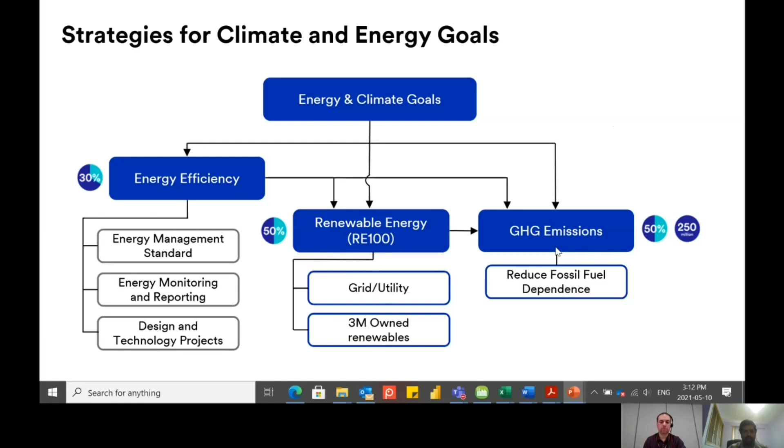And I think Brian will start from here. Yeah, thank you. So we want to talk to you about the EverActive system that we are trialing here.

The system consists of three different components: the sensor in the field, a gateway that's in proximity to the sensor, and then EverActive's cloud system. The sensor sends data to the gateway, and the gateway gets it onto the internet where the cloud can read and store the data and provide some analytics.

The sensor provides data back to the EverCloud system, and the EverCloud system makes the determination based on the thermocouple data whether the trap is bad or not. If the downstream pipe is hot, it will assume the trap might be open when it should be closed, or if it's constantly cold, it will assume the trap has failed shut.

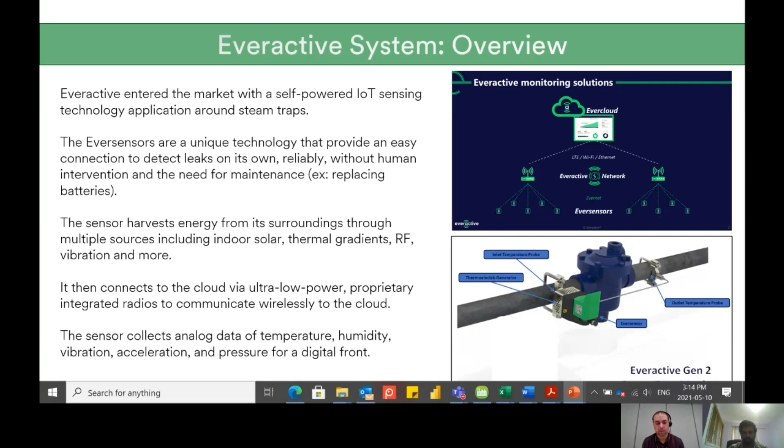We have our system set up to provide us with email notifications. You can do summary notifications, text messages, and other real-time notifications. Next slide.

We've monitored 50 traps as part of this pilot. We've had them in for over 6 months now. During this time, we've detected 12 bad traps, which is about 24%. We estimated that without this system, we would have a bad trap installed for about 45 days before we could respond to it, meaning 45 days of energy loss. With the system in place, our average time until we could get a trap replaced was 12 days. So with that, we saw cost savings of 74% from reduced steam loss, or in other words, 10,600 klbs.

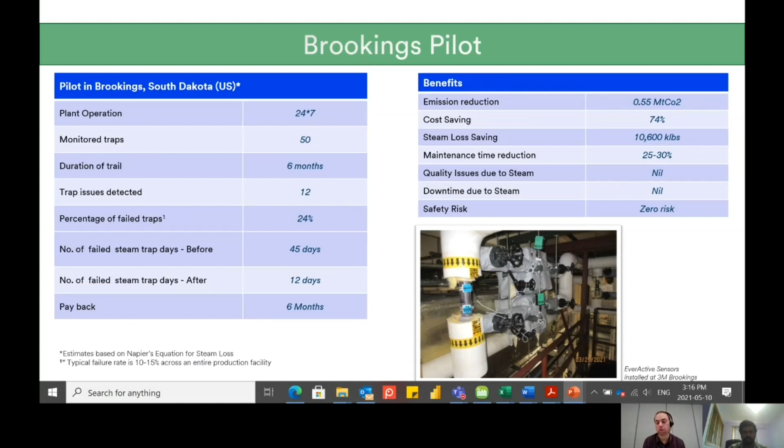So again, you have heard the benefit that we looked into it from Brookings. So as a corporate, we want to expand this to the other 3M facilities to start monitoring the steam online. So we put together a proposal for the top management. We started calculating some of the benefits, how it looks when we implement this across the US and Canada sites. We have about 9,300 traps and more. So we quickly calculated what will be the cost savings if there is a 15% failure rate. We are achieving like 24% of cost savings on it. The emission reduction by that is about 160 kilotons of CO2, and the payback is about 4.2 months.

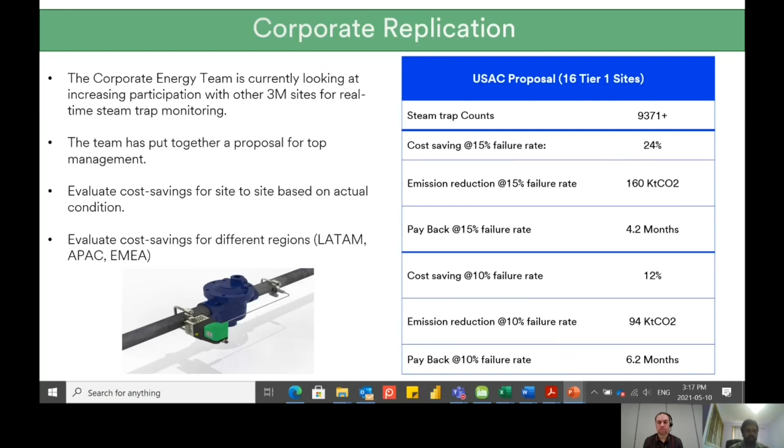We also calculated a similar type of assessment for a 10% failure rate, if the trap fails at 10% of total traps. We are able to calculate savings of about 12% reduction in cost, and the emission is about 94 kilotons of CO2, and the payback is 6.2 months. So it's somewhere between 6.2 to 4.2 months where our failure payback comes in. We are trying to do this globally, and we are working with different regions to see whether we can implement these projects across 3M to benefit.

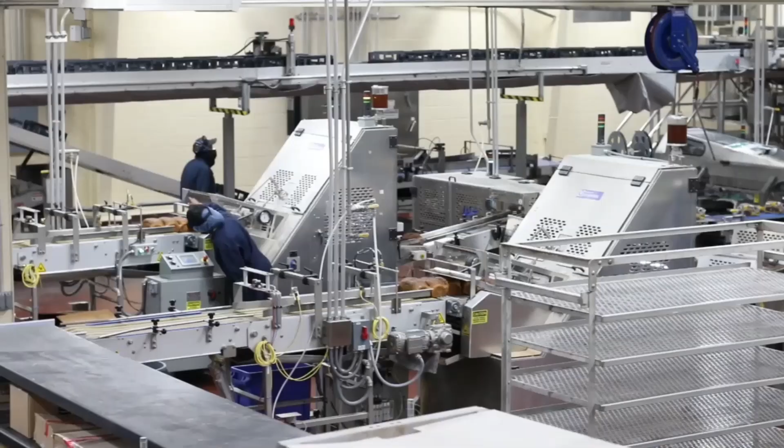Good afternoon. I'm Margaret Marsh, Vice President of Sustainability and Environmental at Flowers Foods, and I'm pleased to share the story of the conversion of our Lynchburg facility from a traditional bread bakery into a facility capable of 100% organic baking. Before I start, I'd like to take a moment and thank the DOE for this honor.

The Better Project Award is particularly special for two reasons. First, it's a detailed and data-driven award, rooted in metrics. Second, it's such an honor to be recognized among such notable sustainability leaders. Congratulations to all presenting their projects today. We are learning from your examples.

Now, a bit about Flowers Foods. Flowers operates 46 bakeries in the U.S. Some bake traditional loaf bread and buns. Others specialize in baked snacks or gluten-free bread products, and some specialize in organic bread, for which the consumer demand is growing rapidly.

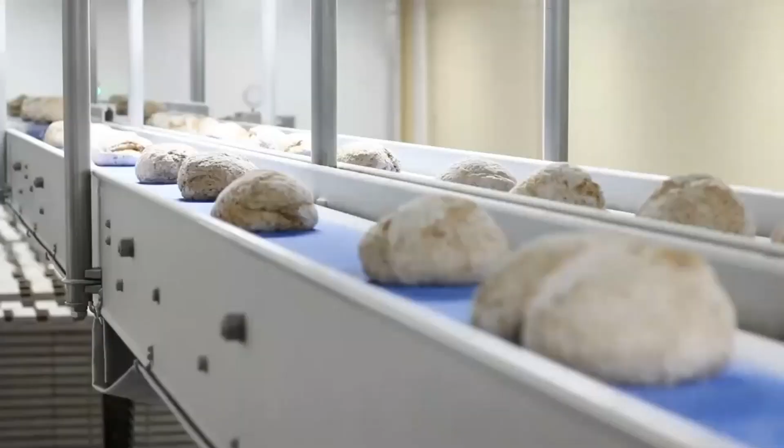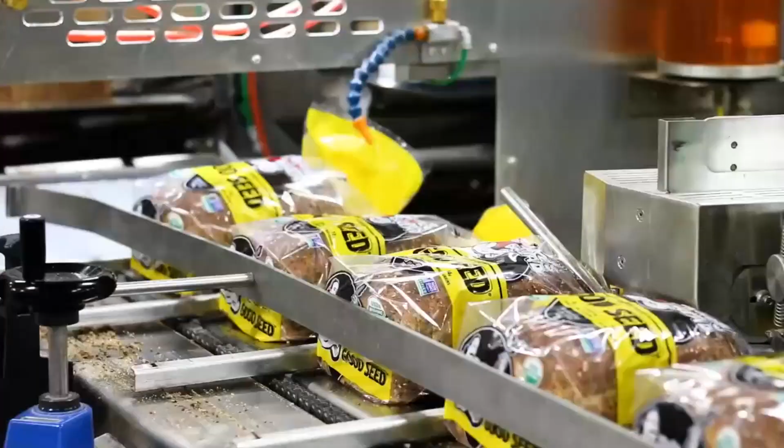That brings us to our organic upgrade in Lynchburg. To meet this increasing demand for organic bread, we converted an existing traditional bread bakery into a state-of-the-art, energy-efficient organic bakery focused on Dave's Killer Bread, the #1 organic bread brand in the U.S.

We selected our Lynchburg bakery for two reasons. First, a stable and reliable team of 125 dedicated employees. Second, the bakery's strategic location. Its proximity to key interstate highways helps reduce transport miles and improves access to important Mid-Atlantic and Northeast markets.

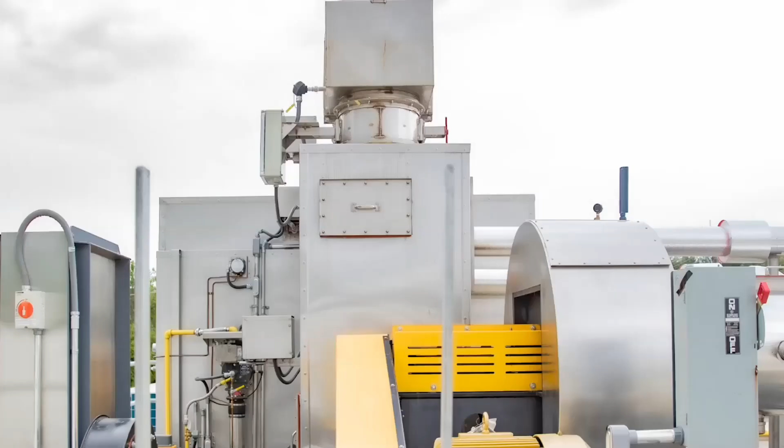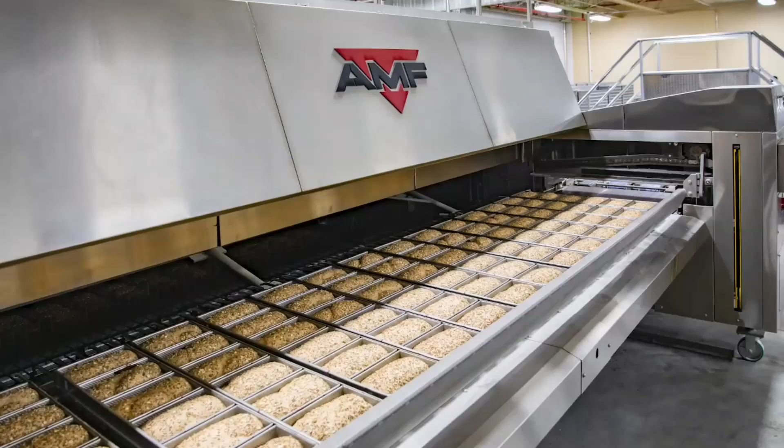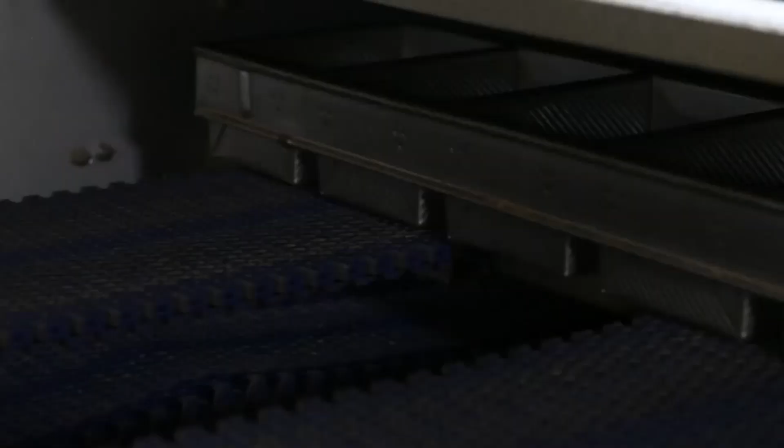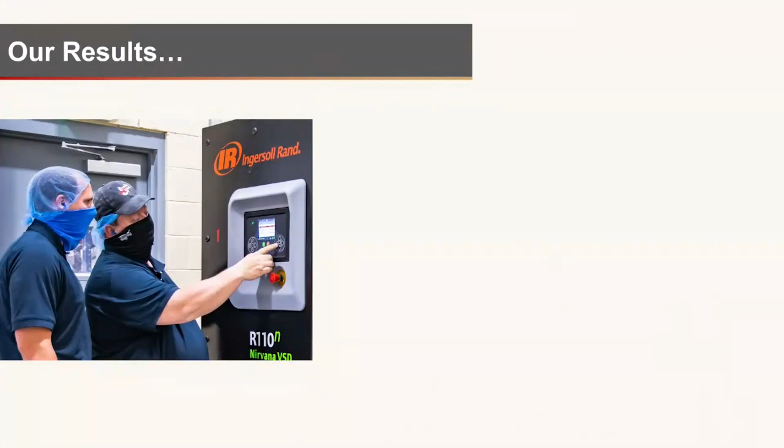This also reduces heat levels in the plant, especially during the summer months, making a more comfortable working environment for our bakery team. As we measured our outcomes, I find the numbers speak for themselves.

Based on 4 months of operational data, these energy-saving features decrease the energy intensity and water intensity of the bakery significantly. Overall, the upgraded sustainability features in our Lynchburg facility are predicted to reduce annual energy 22% and water consumption 64%.

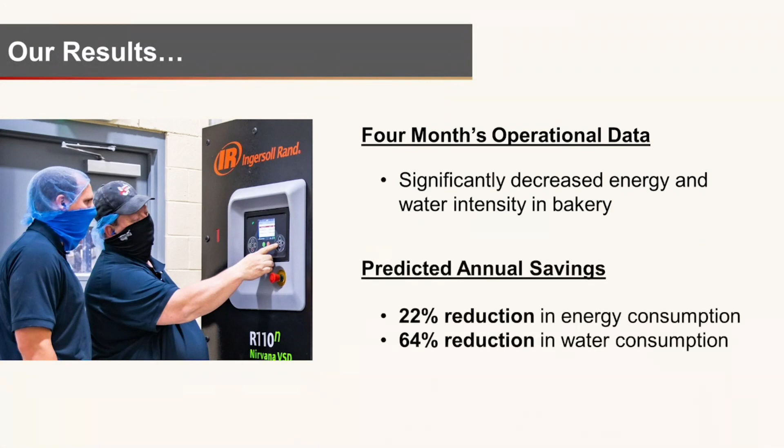But our most important metric? It's our people and the energy they put into this work. In fact, the results of our engineering and planning teams are outstanding. Due to COVID-19, construction was originally delayed 3 months. However, our dedicated corporate engineering team worked closely with vendors, and as a result, the bakery opening was only delayed by 1 month.

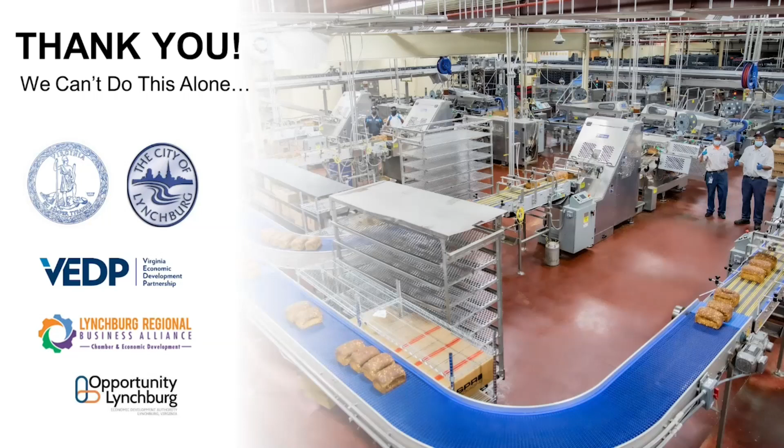That allowed our experienced and long-tenured bakery employees to return to work quickly and bake quality organic breads for the region. Throughout the project, we had unbelievable support from so many, and we say a heartfelt thank you for making this conversion such a success.

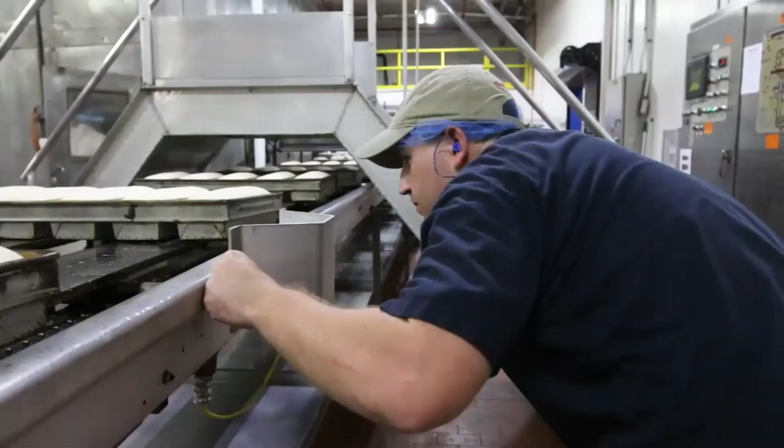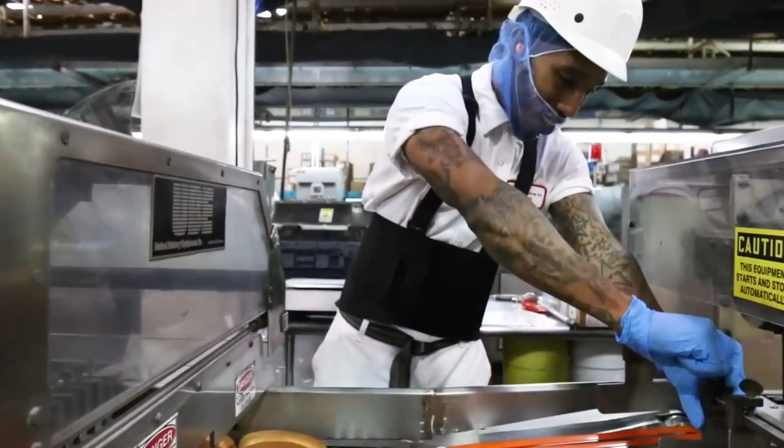Our story doesn't end here. This is a journey in continuous improvement across our entire bakery network. The Lynchburg organic conversion is the next iteration of past projects and learnings, and it serves as a platform to share and implement best practices during our next sustainability projects. On behalf of our team, I thank you again for this honor, and we look forward to seeing you again next year.

Good afternoon. My name is Scott Christensen. I'm an operations engineering manager with Graham Packaging Company, having responsibility for operational improvements within our North American plant operations.

Graham Packaging was founded in the 70s with the conversion from oil fiber cans to plastic containers. Our company now provides plastic containers for the food, beverage, home care, and industrial markets. Graham Packaging is an expert in sustainable, innovative, and creative packaging solutions. At the heart of this new Graham brand is the idea of being always inspired to create a better product and cleaner world.

At Graham Packaging, our commitment to sustainability goes beyond just the bottle. Recognizing that climate change is real, we are taking steps to reduce our greenhouse gas emissions by lightweighting our containers, diverting plastics from landfills, developing lower carbon products, locating facilities on site with customers, and energy reduction. Graham Packaging is driven to minimize our impact on the environment and work with consumers to create a circular economy.

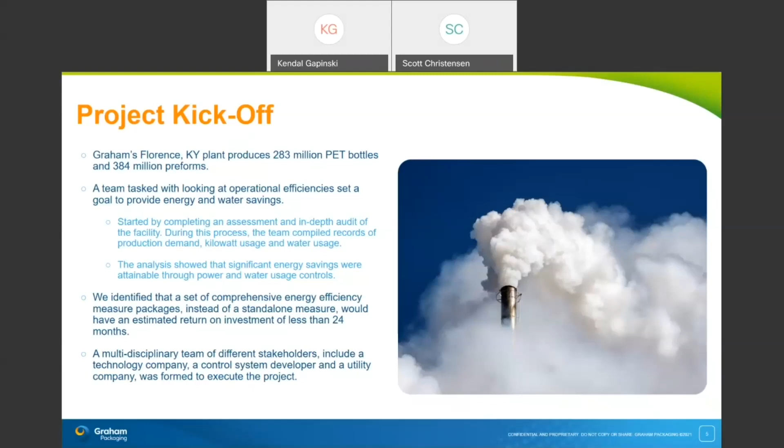We identified that a set of comprehensive energy efficiency measure packages, instead of a standalone measure, would have an estimated return on investment of less than 24 months. A multidisciplinary team of different stakeholders, including a technology company, a control system developer, and a utility company, was formed to execute the project.

During the team's discussions, it was determined that the energy savings measures implemented needed to also ensure that the plant could continue to operate the equipment at peak performance.

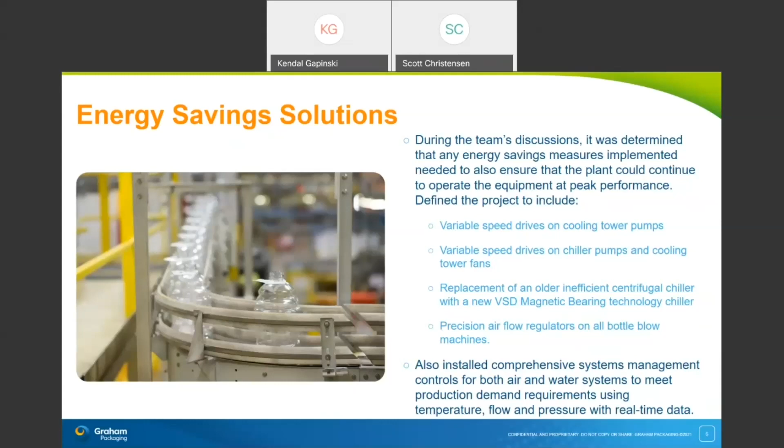The project included variable speed drives on cooling tower pumps, variable speed drives on chiller pumps and cooling tower fans, replacement of an older inefficient centrifugal chiller with a new variable speed magnetic bearing technology chiller, and precision airflow regulators on all blow machines. We also installed comprehensive systems management controls for both air and water systems to meet production demand requirements using temperature, flow, and pressure with real-time data.

The project was not without expected challenges. Significant barriers included the need to maintain precise water temperatures, flows, and pressure to key systems and production equipment, and the need to limit the downtime of the equipment during implementation as to continue to meet customer demand.

We overcame them by building to the project thermal control valves, combining the developed project timeline with other projects that were completed during scheduled shutdowns of the facility in order to lessen the impact on production.

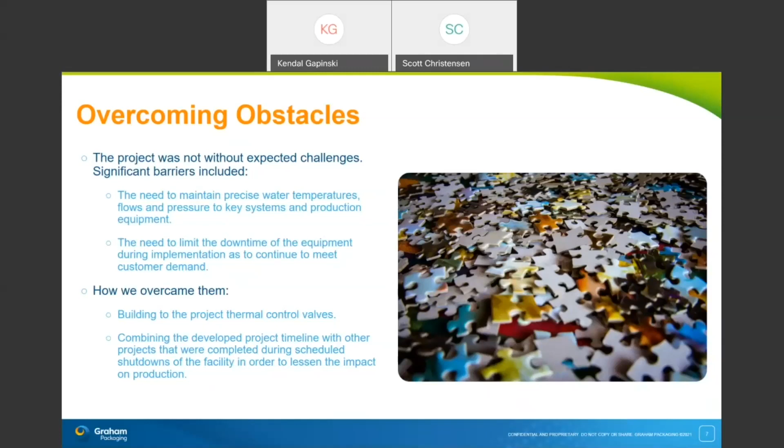Implementation and execution: Graham Packaging worked in partnership with IZ Systems, Johnson Controls, and Duke Energy. Graham was able to create and implement a vigorous timeline. We started the first quarter of 2019, completed in July of 2019.

To help stay on budget, the maintenance staff of the facility was trained in the operation, management, preventative maintenance, and limitations of the newly installed system. This also proved to be a cost savings in the future by allowing Graham's staff to continue to provide the proper care and maintenance of the equipment.

Johnson Controls provided the York YMC2 chiller, a VSD chiller, which can handle condenser water temperatures below 50 degrees Fahrenheit. This allows the plant to take advantage of colder environmental temperatures within the region to lower energy usage while maintaining a production chilled water temperature and increase cycles of concentration of the cooling towers due to less evaporation by heat load of the system.

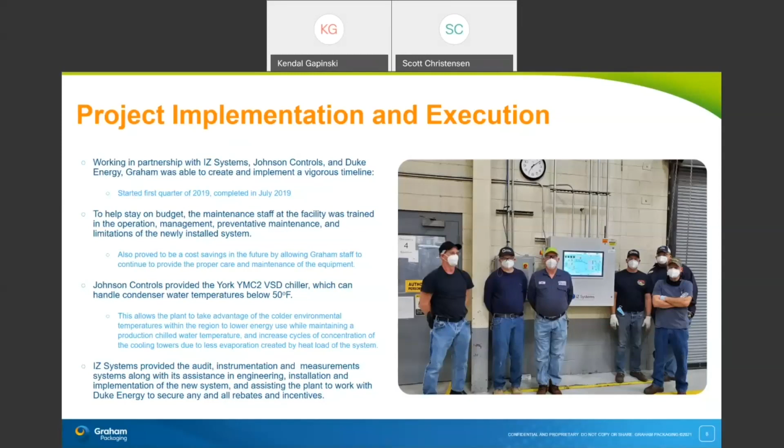IZ Systems provided the audit, instrumentation, and measurement systems along with its assistance in engineering, installation, and implementation of the new system, and assisting the plant to work with Duke Energy to secure any and all rebates and incentives.

The outcomes: we were impressed with the real savings that were recorded and tracked using remote access to the management system. By putting in metrics to track water and kilowatt usage, Graham was able to recognize and reduce the required energy to produce air and chilled water for the process of bottle and preform production.

We saw an 11% reduction in kWh usage from 2018 to the end of 2020. We saw energy usage drop from an average of 1,267 kWh per 1,000 pounds produced in 2018 to 1,127 kWh per 1,000 pounds produced in 2020.

Total kWh savings since project implementation was roughly 7.4 million kWh in 18 months. Pre-project energy spend was 1.2 million per year. The proposed project would drop energy spend to just over 891,000 per year. Proposed savings dollars were 381,000 per year. Actual energy savings ended a little over $470,000 per year.

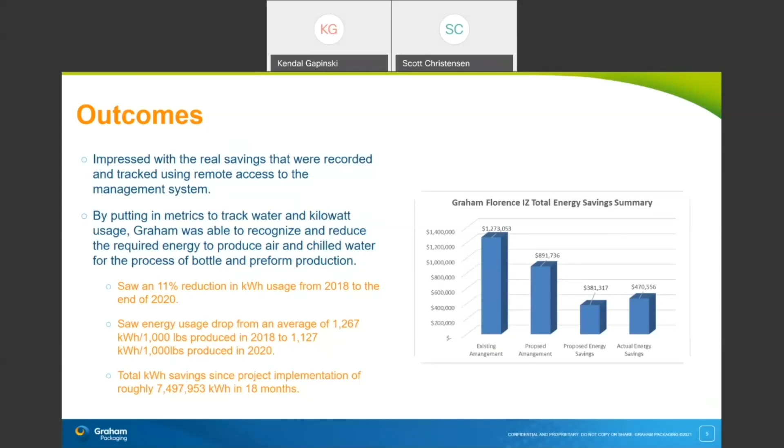With the project success of the Florence, Kentucky facility, Graham has strengthened its commitment to investing in more of their facilities with this technology. So far, Graham has implemented similar energy savings projects at 5 plants throughout the United States, with plans to grow the program even further.

While this technology is not a one-size-fits-all solution for eliminating excessive energy usage, it is an example of Graham's commitment to reduce energy usage throughout all of its 60-plus locations and its work towards its long-term goal of achieving 25% energy reduction by 2028.

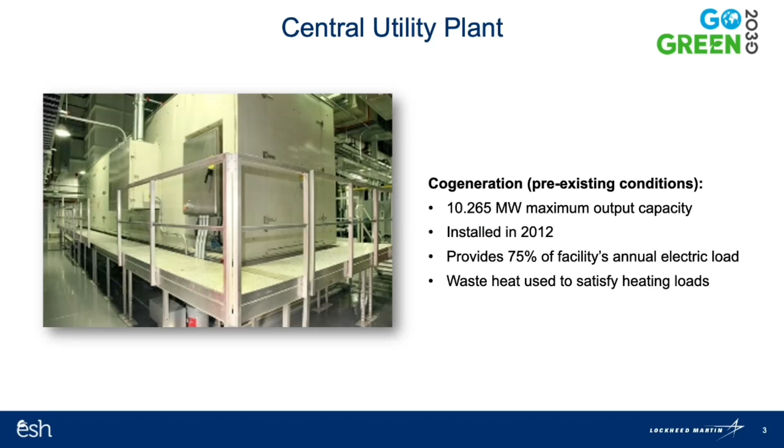This slide provides a high-level overview of how Stratford recovers the waste heat from our 10 megawatt generator. This cogen system produces 50,000 pounds of steam per hour when operating at full capacity. If more heating is needed, the supplementary firing of a duct burner can be called upon to produce 30,000 pounds of additional steam. In the past, the high-pressure steam was mainly used for heating the plant. Cooling demands were also partially satisfied by a pre-existing absorption chiller that operates off low-pressure steam.

In 2017, we began to explore additional alternatives for maximizing the value of the waste heat. This became phase one of our plant optimization strategy.

One area of focus for utilizing the steam was replacing a 395-ton electric chiller that created the cooling required to maintain the temperature of the inlet air to the cogen's turbine. In 2018, this unit was replaced with a 400-ton absorption chiller that makes use of excess low-pressure steam. By switching from electricity to waste steam for cooling, this site expects to save approximately $116,000 per year in operating costs.

During the same year, we also introduced a steam-driven air compressor, which utilizes the high-pressure steam to drive a steam turbine that is coupled to a centrifugal air compressor. The air compressor generates 800 CFM of compressed air that is used throughout the manufacturing facility. Medium pressure steam is then exhausted from the turbine and is used for facility heat, process loads, and absorption chillers.

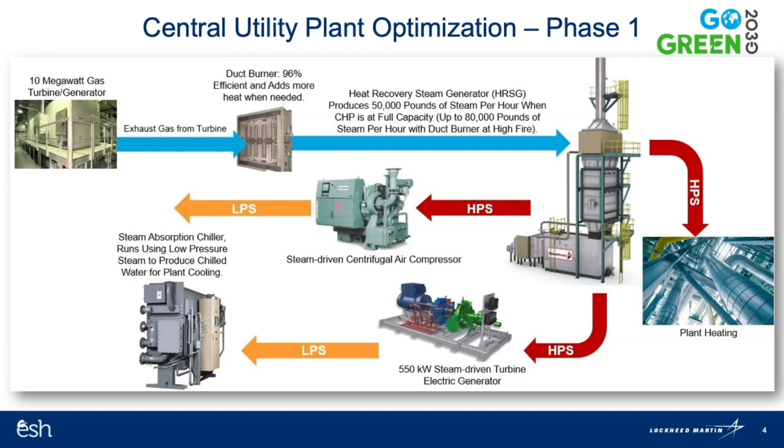During the early stages of the design for this comprehensive project, it was understood that our existing interconnection agreement with the electric distribution company would have to be modified since we were introducing a new generator. This was considered phase two.

When the original application was submitted 10 years ago, it was set up for import only. To ensure that power was never sent back to the grid, Stratford was required to import a minimum of 600 kW at all times. If for any reason the load were to drop below 600 kW, the site would be automatically forced into an island mode. This would be extremely problematic for production activities at the site since the cogen's maximum output capacity could only provide partial power to the facility during normal business hours.

The site also had to be mindful of maintaining enough load on the cogen. To keep the unit in a stable condition, it must operate at a minimum of 5 megawatts. During on-peak hours, this requirement is typically not a problem. However, there was a growing concern that this could create issues during off-peak hours, since electric demand drops during these times. Maintaining enough load on the cogen was also starting to be more of a challenge in recent years, since the site was very active in reducing demand through energy conservation.

It was also understood that running the new 550 kW generator would reduce our demand even lower. With all this in mind, it was evident that permission to export power back to the grid was necessary, and the decision was made to include this request within the interconnection application to the utility.

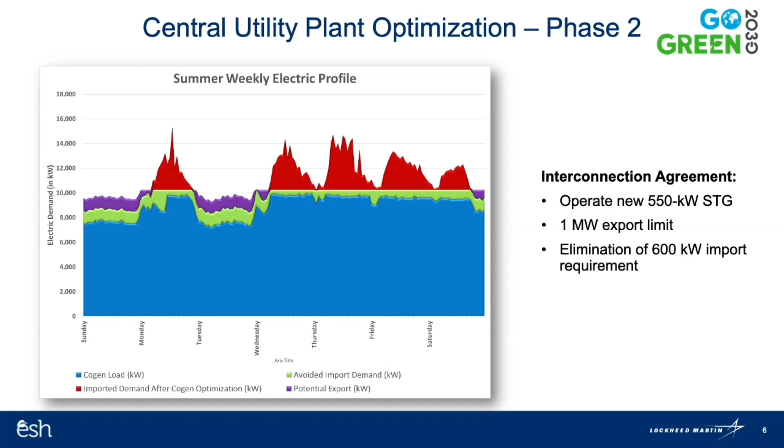This should equate to about 1.5 million in cost avoidances year after year. Should the cost of electricity remain flat, the overall project offers a 2.2-year payback.

Since completion, Sikorsky has exceeded the projected savings month after month. Operations has also seen major improvements with the performance of the cogen since the load profile has adjusted and remains much more uniform. This has also prevented system trips.

Prior to closing out this new interconnection agreement, trips were a common occurrence. However, we have not seen a single trip in over 4 months, and this has helped us avoid huge demand spikes in our electric bill.

Overall, this comprehensive project has been a major success. It has also prompted a review of potential cogen use at several of our Lockheed Martin facilities.

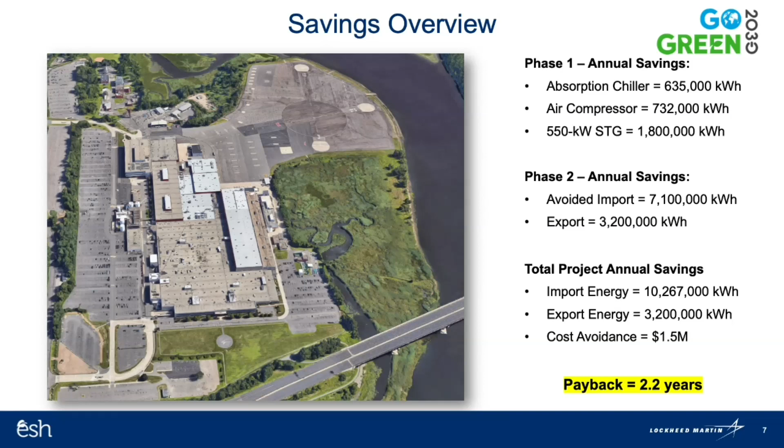In closing, Lockheed Martin and Sikorsky would like to thank the Department of Energy for this award recognition, and we look forward to the opportunity of nominating our future projects. Thank you.

It's great to be here today to talk about the award that the U.S. Department of Energy has given to Nissan. It's a Better Project Award.

Just to give you a little bit about Nissan, we have 3 major manufacturing facilities in the United States: one in Canton, Mississippi, where I'm at, one in Smyrna, Tennessee, and one powertrain plant in Decherd, Tennessee. We also have test facilities, our headquarters is in Franklin, Tennessee, and a test facility in Arizona, plus a number of other facilities across the United States.

Just to give you a heads up of what we manufacture, here at Canton last year we manufactured the Altima, the Titan, the Frontier, the cargo van, the passenger van, and also the Murano. And in Tennessee, they manufacture the Rogue, the Leaf, the Maxima, and the Pathfinder.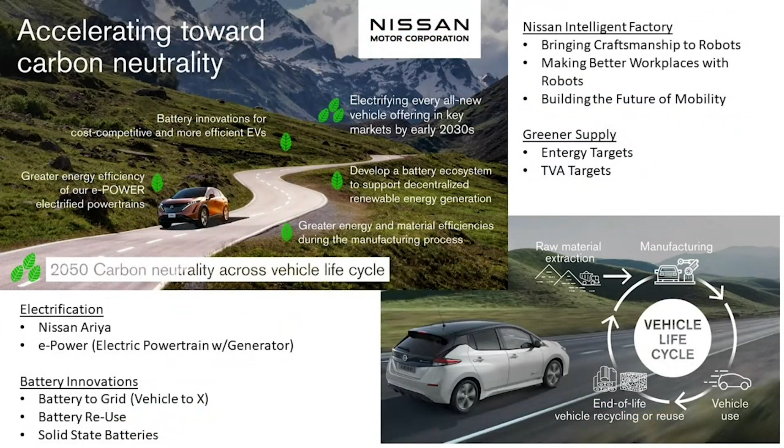One of the big things going on with Nissan is we have a 2050 carbon neutral goal across all of our manufacturing across the world. Some of the things we're going to develop include having more electric vehicles in the market by 2030, and also developing a battery ecosystem. So it's one of our goals to be carbon neutral by 2050.

Now, here at Canton, this is a picture of our facility. It's close to a 5 million square foot facility, so we have a lot of air to maintain for quality, temperature and humidity. So we had this project come to us about upgrading the controls on our AHUs.

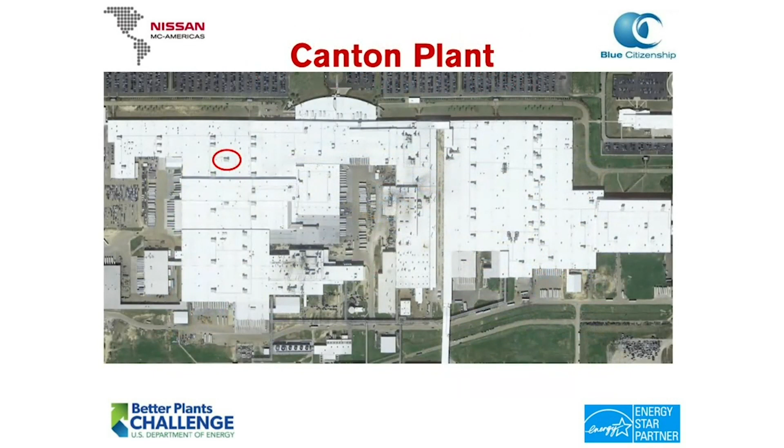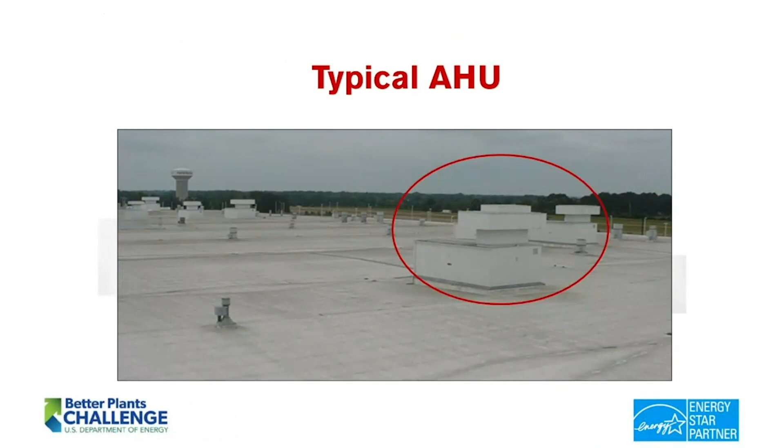Here is a blow up of the plant, and I have one of the units circled, and then we'll blow up on that unit. This particular unit is a 60,000 CFM unit with a 75 horsepower motor on it. So what we do is maintain these temperatures so that workers can work, as summers in Mississippi do get hot.

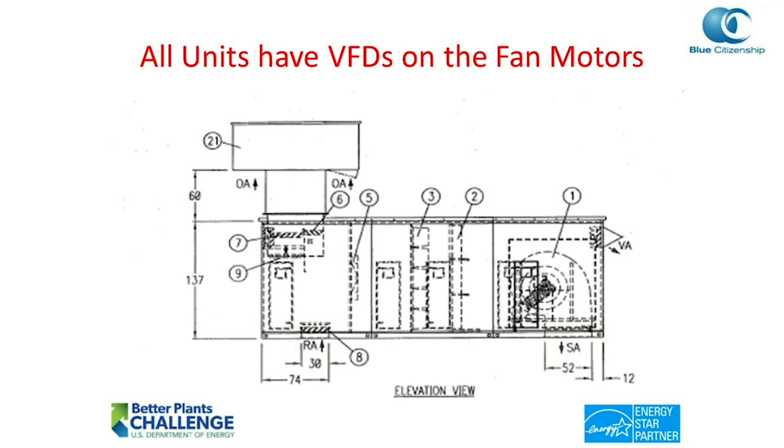Here is a cross section of one of the air handling units. You can see OA stands for outside air, RA is return air, and SA is supply air to the space. With this unit, you have the return air coming in mixing with outside air to maintain air quality. Then you have a heating section, a filtering section, and a cooling section before the air is delivered to the space.

We have done this upgrade on our air handling units, and the ones in black, the numbers, are the units we've upgraded the controls on. What we've done for the upgrade is that now the units are maintaining themselves. They have logic in them so that when the temperature is met, they back off the variable speed drives some so that the energy used is dropped.

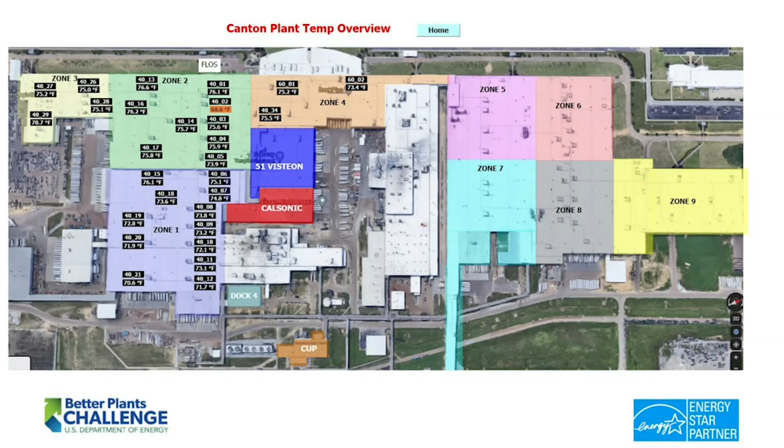So these are the units that we did, and I'd like to go to zone 1. This is zone 1, and you can see the hertz on the different units. I'd like to zoom in on zone AHU 40-08.

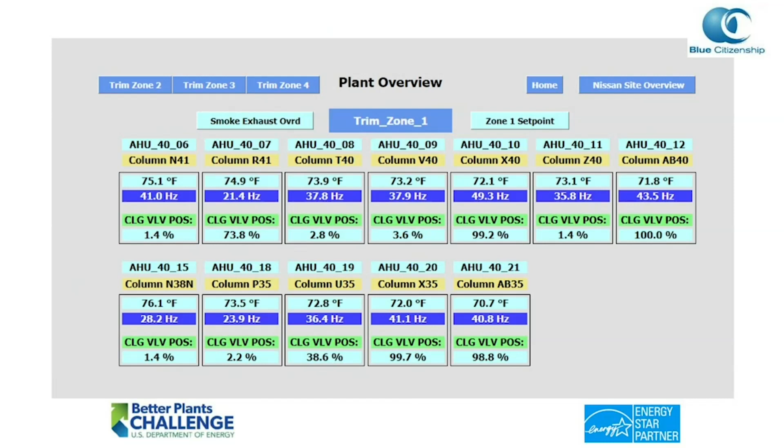So it's maintaining the air temperature and humidity below the set point right now, and that's why it's able to back off the variable speed drive.

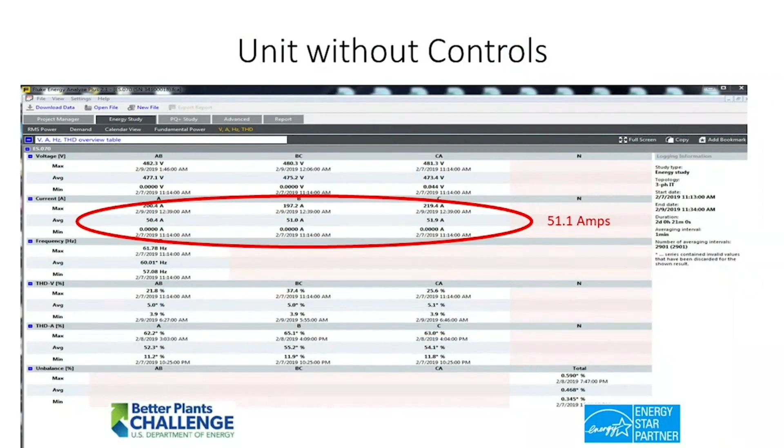Before we started this project, we did one unit. We first did a test where we didn't have the controls turned on an air handling unit. The unit ran for roughly 2 days, and we averaged 51.1 amps. Then after we turned on the controls, the unit averaged 22.186 amps, which is roughly a 24 kilowatt drop.

When you have a lot of air handling units and you're able to have them control themselves, not have to wait for somebody to set the temperature, it saves substantial energy.

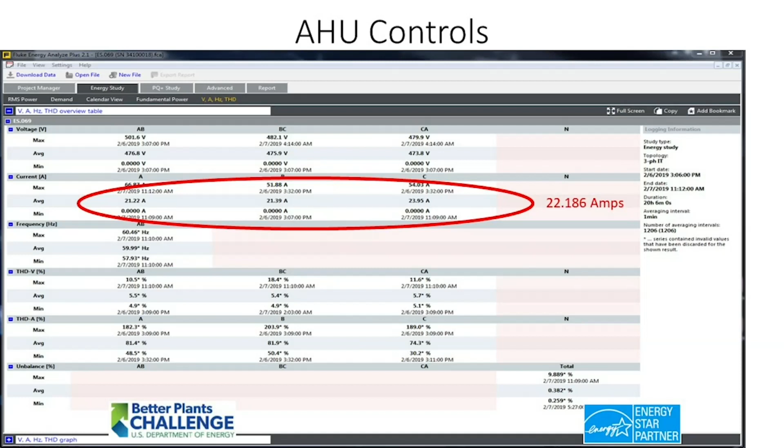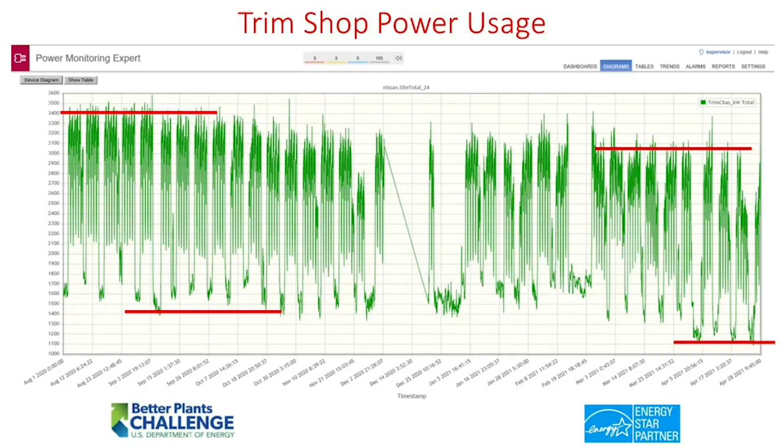Roughly it's about 5 million kilowatt hours that it saves us, and 1,800 metric tons of CO2. So it was a very good project.

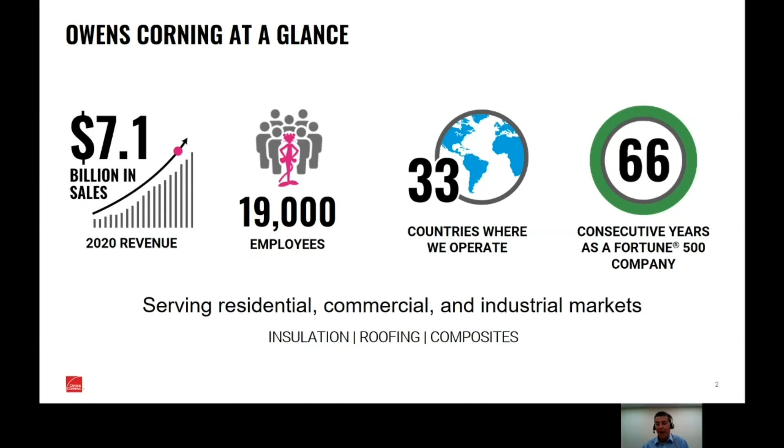Owens Corning innovation is all around us, in how we move, where we live, what we do, and how we power our lives. You can find our products in automobiles, homes, watercraft, and wind energy, just to name a few.

What does sustainability mean to us? We want to be a net positive company. That means that our handprint outweighs our footprint. We want to meet the needs of the present while leaving the world a better place for the future.

Before I start talking about the projects, I'd like to talk a little bit about demand side energy management at Owens Corning. We think these themes are critical to accomplishing our results, and you'll see some of them in the project when I talk about it.

The first thing is a foundational item: plant energy teams. This is very, very important. It's how we get projects done, how we get low cost, no cost implementations. Without plant energy teams, a local plant energy leader, a team that meets at least once a month, it would be hard to accomplish much.

The other thing that's a big focus for us is assessments and Kaizens. So we do assessments on energy consuming systems, and then we have Kaizens or treasure hunts to look for low cost, no cost opportunities where we can implement things right away to save energy. Things like shutting off lights, turning off equipment that doesn't need to be used, adjusting set points, and fixing leaks and things like that.

Another best practice that Owens Corning has in the energy program is a dedicated energy capital project fund. This is money that's allocated every year for energy projects, so they don't have to compete against other productivity type projects, and so that we make sure that we continue to make progress every year, no matter whether it's a good year for funding or a bad one.

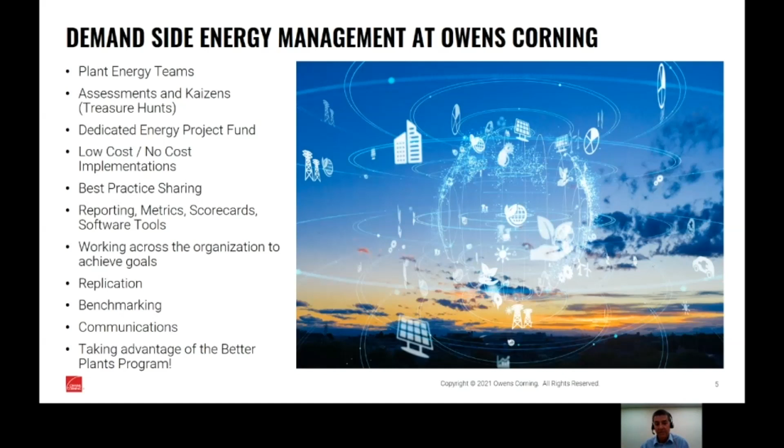In the past, what we had were proprietary systems from HVAC vendors that controlled parts of these components. But those systems were never set up to control the whole system altogether. The other problem was they were kind of closed systems - our people couldn't go in and look at them or edit them or make changes or understand what was going on. It required outside support all the time.

The new system is PLC based, and our electricians and maintenance folks can easily understand it. It takes all the components and puts them together in real time so that they're giving us the required amount of cooling at the absolute lowest possible energy cost.

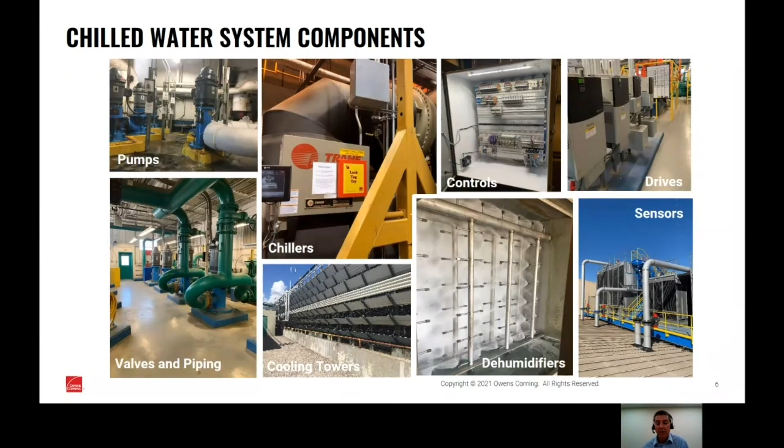The system's able to detect things like when we can use free cooling - say the atmospheric conditions are right, we have low humidity outside and the temperature is moderate. We may not really need to run the chillers that day. We can just spray water in the dehumidifier and get the required cooling via the evaporative effect.

At first, we treated this as a low cost, no cost savings opportunity, and an adjustment was made. But when we started thinking about it a little bit more, we understood that if we could automate all this together and get all the equipment coordinated so people wouldn't have to touch it and constantly be tweaking it, we'd be better off.

So the next year, our energy engineer started working with an internal subject matter expert and an external HVAC controls vendor to define requirements and started planning something out.

In 2018, we had a big brownfield project coming up, which was roughly doubling the size of one of our plants - we put a new production line in. So what we ended up with at the end of that was one side of the plant, the new brownfield side with the new control system for HVAC, and the other side of the plant with the old way we used to do things.

In 2019, when the brownfield plant finally started up, we were able to easily measure and verify the differences because the two were sitting right together, and we could see that the new system was saving significant energy on the order of 36% over the way we were doing it before. So it was very exciting.

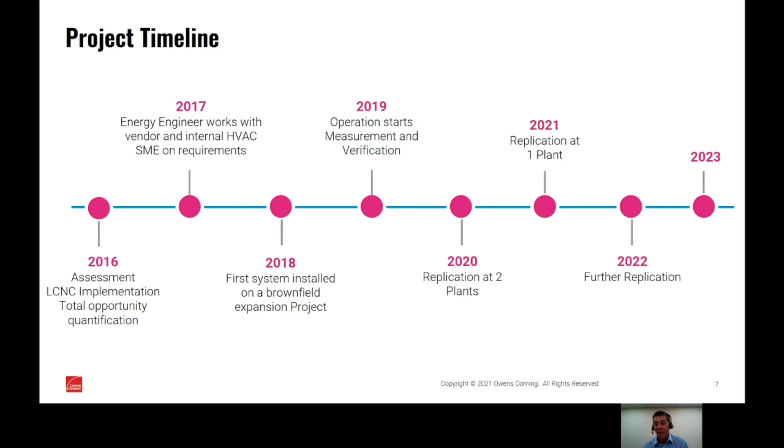It also keeps track of the energy that we're saving over the old way that we used to do things, and it converts that into greenhouse gases and other equivalents.

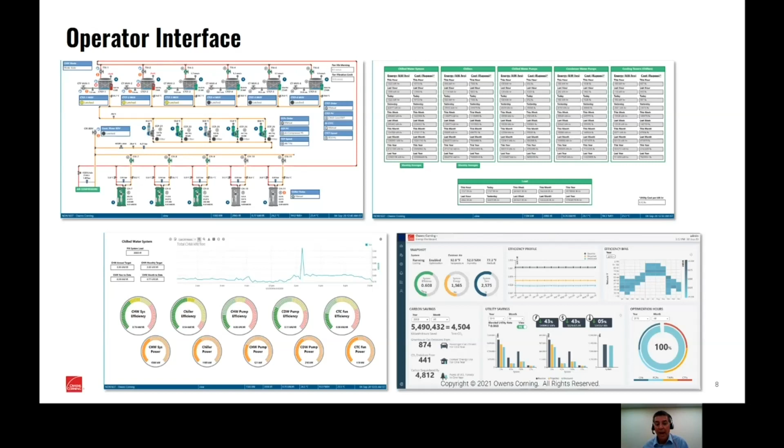Hello from SugarCreek Packing. Through the Department of Energy's Better Plants Program, we were able to utilize the Fluke ii900 ultrasonic leak detector. This piece of equipment allowed us to inspect all of our equipment, piping, and vacuum systems throughout our entire plants in a matter of days versus months or years.

The process previously was, if you had a listening device, headphones, you were hoping to find something. If not, you had to go hand over hand and soap every joint, every connection. If you got lucky, you could find 4 or 5 a day. But with the ultrasonic leak detector, you can find every one of them in a matter of time. It's quick, it's easy, it's to the point.

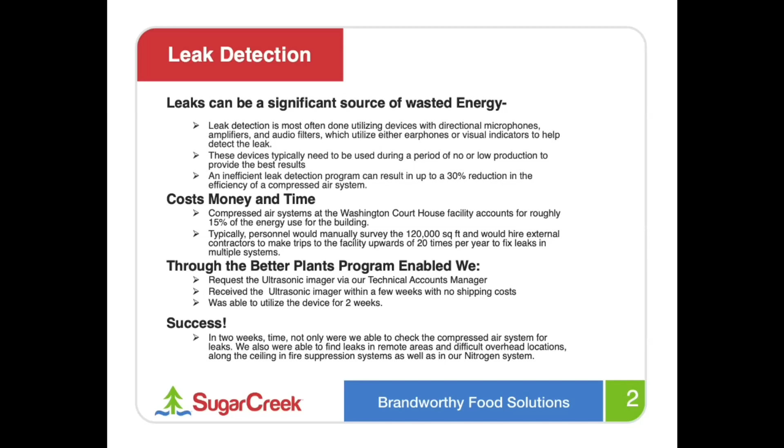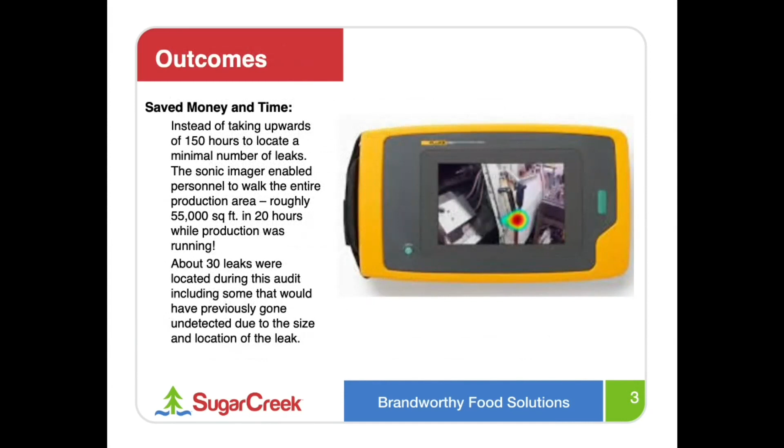The equipment looks like a handheld video game, nothing fancy, very little controls. You can walk through a building. Like we said, we did 55,000 square feet in about 20 hours while we were running production. And it took us 20 hours because we found leaks, we fixed them, went back and tested everything again.

Here's a picture from the ultrasonic leak detector of one of our high temperature areas. Personnel are limited to this area, usually 5-10 minutes, about all the heat you can take, but we can walk in there, find the leaks, and then have a plan for a down day when we're not running, and go in and fix those leaks without having to worry about heat exhaustion.

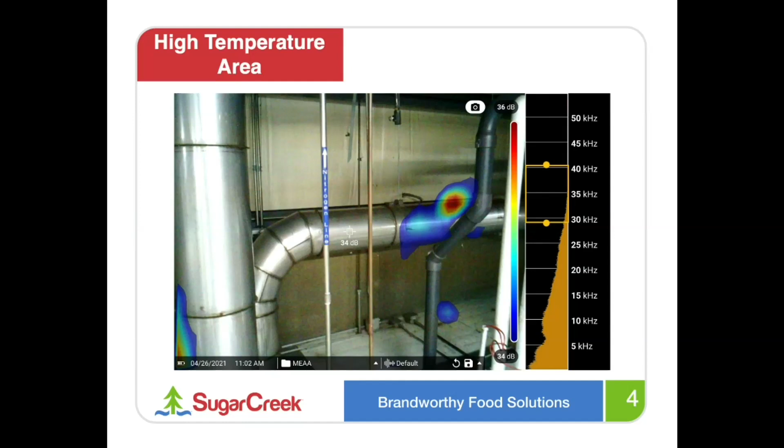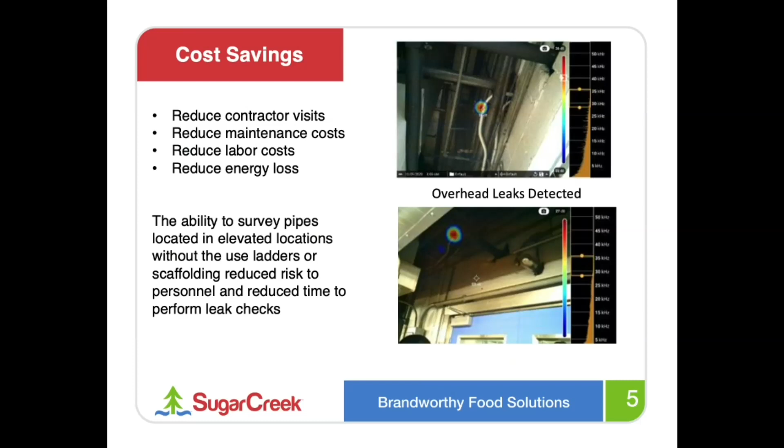With this piece of equipment, we were able to reduce our contractor visits because we could tag exactly where the leaks were on our refrigeration systems, as well as our fire suppression system because they're air over water. This reduced the costs of many of our visits. We could have 4 or 5 leaks fixed at a time versus 1 every other day. This helped us reduce our costs, save our energy, and spend more time actually making bacon versus fixing stuff.

This is one of our hard to reach areas. It's about 15 feet down to this area. We try and stay out of it as much as possible, but it's easy to get in there with this piece of equipment, scan it, move on, and we have a plan for another day.

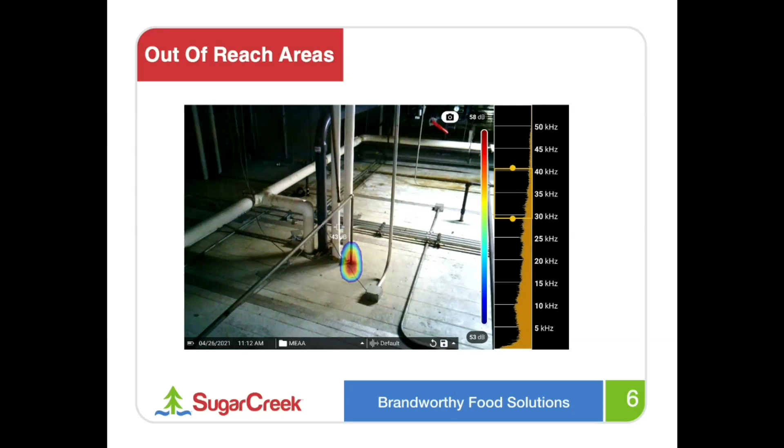With this being newer technology, I wouldn't say it's a severely expensive piece of equipment, but about $21,000. It's limited on how many you're going to buy and how often you're going to use it.

With borrowing it from the DOE, we've had it twice now. We've used it at 3 of our plants. Our plan is to keep borrowing as much as possible so we can continue to survey the rest of our plants. Because at SugarCreek, we have new buildings and old buildings, and it doesn't really matter which one it is, we find the exact same amount of leaks, whether it's a brand new system we just put in or one that we've been running for 20 years.

We find the leaks that previously we weren't really paying attention to. It was easy to see the water leaks, but the nitrogen, the steam, the vacuum, those were a little harder to find. So with the Fluke II900, we were able to process many rooms in our processing facility within hours and get a game plan with our maintenance staff to go through and fix all those.

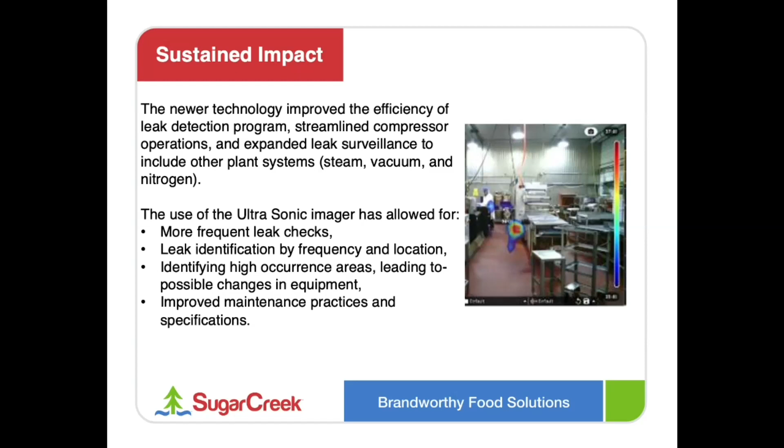Hello, I'm Alex Floyd with Tyson Foods, and today I'd like to share with you a project that we did across all of our sites that have ammonia refrigeration. So between our processing plants and distribution centers, we're talking well over 100 facilities.

I ran across this quote that really sums up what we were trying to accomplish: continuous learning is nothing without continuous doing. We've all sat through training, classes, and webinars where we took in some really great information, but we never actually took that and implemented it at our facilities. So how do we solve that problem?

Just like all of you, we were faced with unprecedented challenges in 2020. Some of us had to learn how to work from home. We were no longer allowed into some of our facilities. At Tyson Foods, safety is our number one priority for both our team members and others, so we spent a large amount of capital on the response to COVID-19 to protect our people.

I have to give a large amount of recognition to our Better Plants technical account manager, Wago, for this project. We got together to really answer the question: how do we drive success and energy efficiency during this pandemic? There was no option to do an in-plant training anymore, so what does a virtual in-plant training look like in ammonia refrigeration?

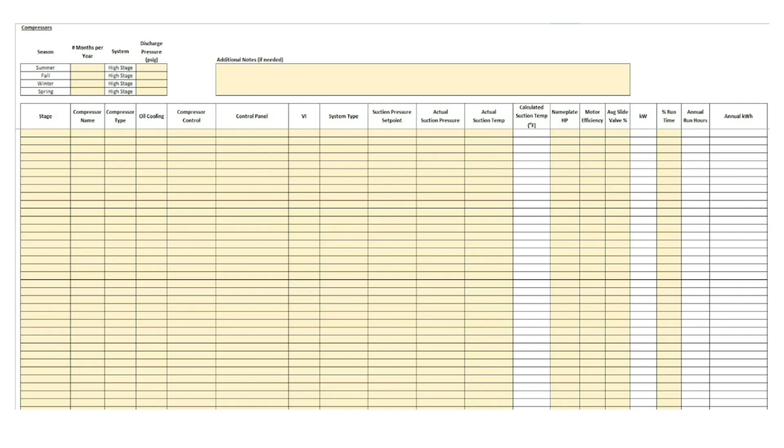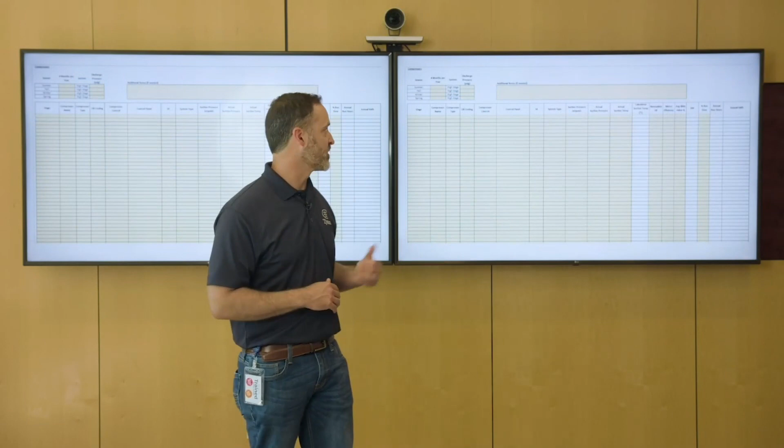As you can tell, there's a lot of columns that we asked to fill out, and this is not as simple as just filling out equipment data. We had to look through logs, we had to look at trends, we also had to interview operators to help us come up with the operating parameters that we had to put into our systems. And this is just for compressors—we did the same for condensers as well as evaporators.

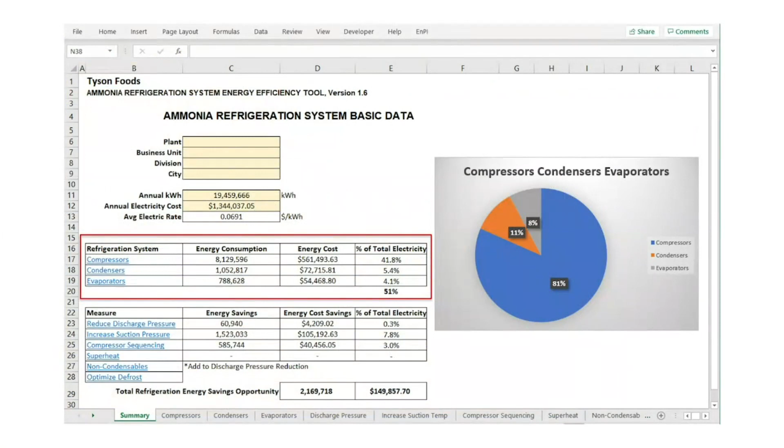Once we got all this input in, it would roll up into our energy consumption that we have within our refrigeration system. Now, once we have this information, we can begin to quantify the energy conservation measure impacts that we have.

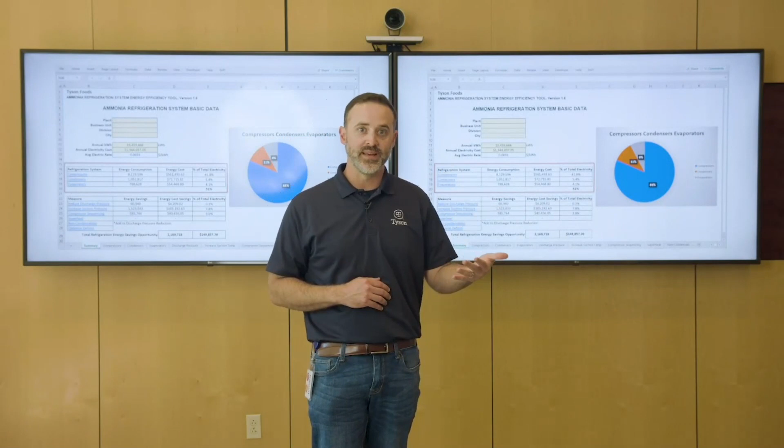Can we reduce our discharge pressure? Not only do we want to know what that number is that we can reduce it to, but what is the limiting factor? Can we operate our systems more efficiently to overcome that? Or is this an opportunity to plan for capital expenses to help us get better?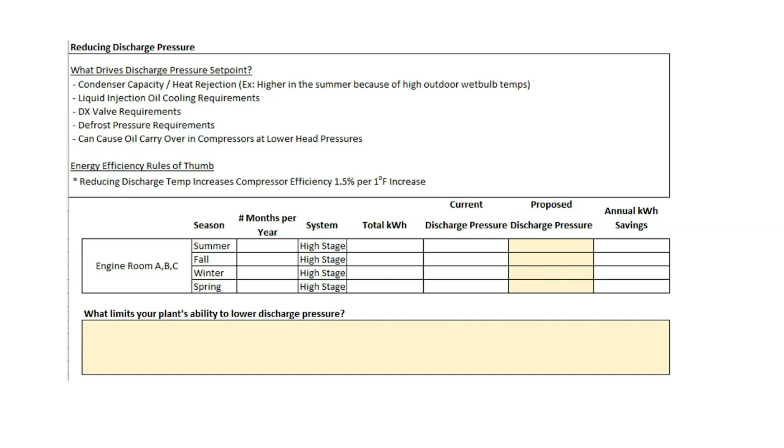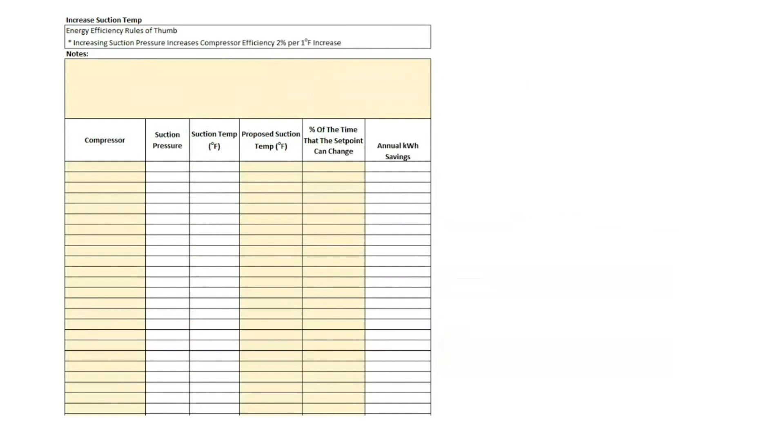Can we increase suction temperature? Now, this is really similar to what you would see with retro-commissioning. How are we performing versus how the system was designed? We have a lot of plant operators that have to respond to production needs, in which they do change set points. But just like any other system, do we go back and reset that to how it was designed?

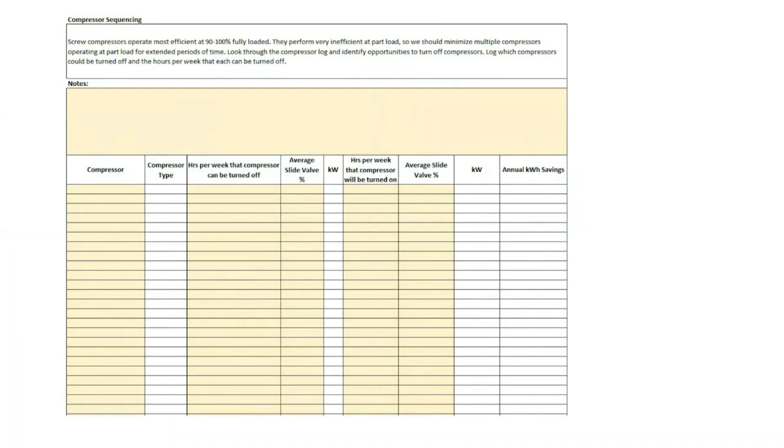Do we have opportunities to sequence our compressors more efficiently? Can we run a smaller compressor versus a larger compressor? Do we have an opportunity to turn off the compressor that's operating at a low slide valve position? This sheet will help us run those scenarios.

Are we balancing our system properly, or are we overworking our compressors?

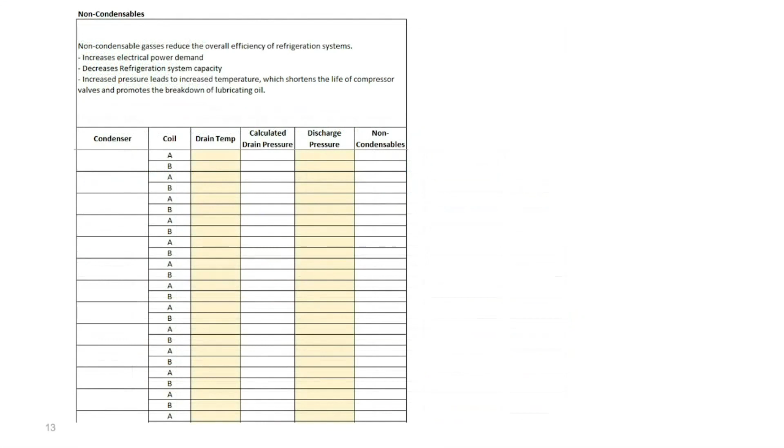Do we have any non-condensables in our system that's directly impacting our head pressure? And now once we get all of these inputs in, we can now calculate the impact that we have with energy efficiency.

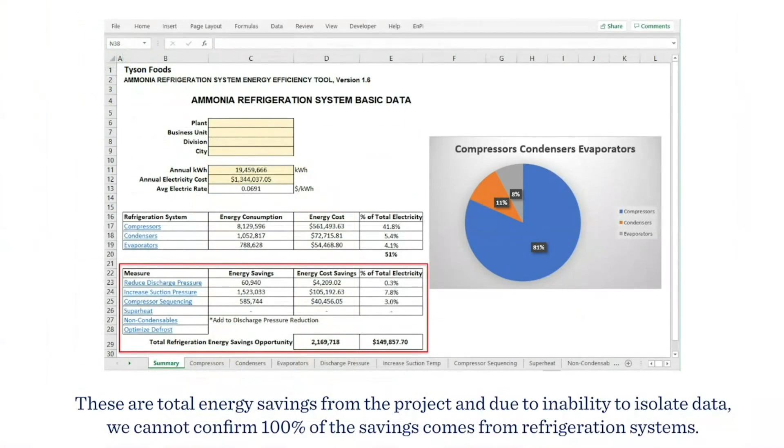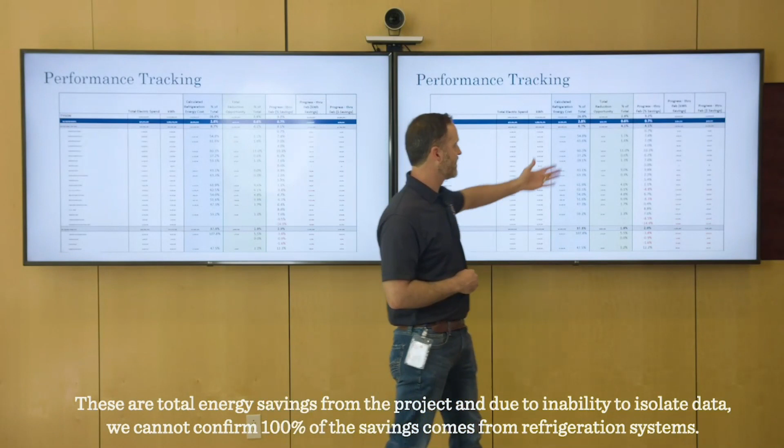Now, I did mention that we have over 100 facilities participating in this project. So we are comparing what they identified in the training versus those realized savings. At the conclusion of this training, we'd identified 2.9% overall energy savings coming from our ammonia refrigeration system. And up until now, this is October to February, we have realized 3.2% savings.

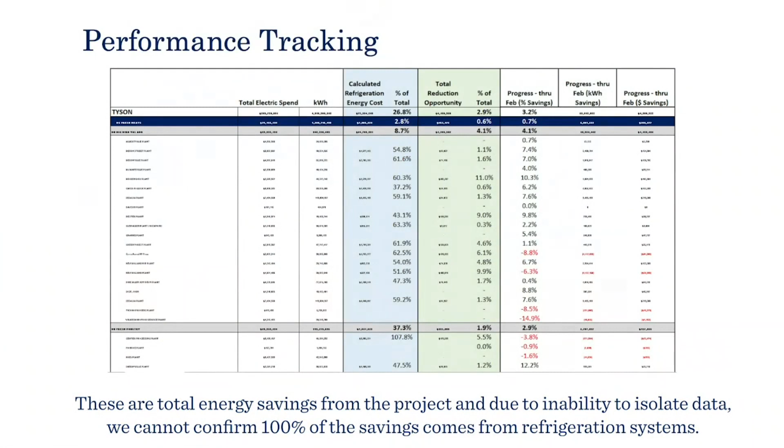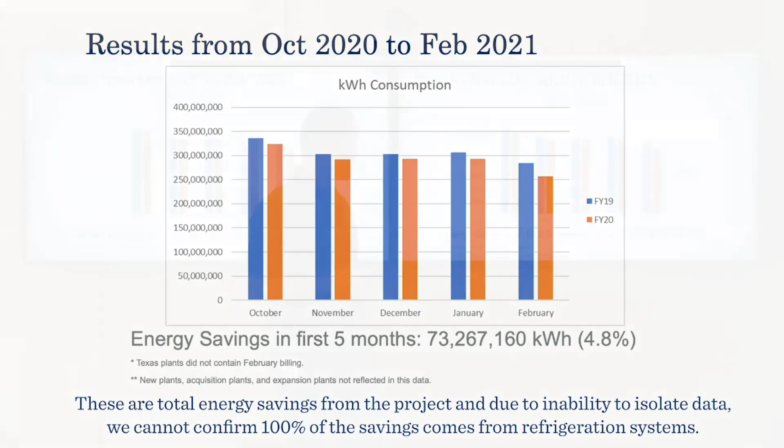You'll see an even better number on this next slide as we take out those plants that are really skewing this data. In just the first 5 months, we have seen over 73 million kilowatt hours worth of savings, which is 4.8% of our total electric consumption. With this data, we did exclude new plants that have gone through major expansions, as well as plants we've recently acquired. We'd like to thank both the Department of Energy and the Better Plants program for this recognition. This has been a great opportunity for Tyson Foods, and we look forward to the continuous partnership.

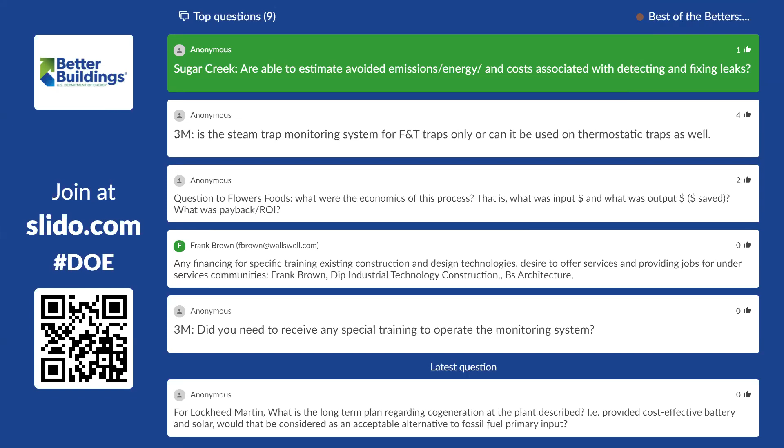SugarCreek, and I know you may have answered this in the chat, but it might be good for everyone to hear: are you able to estimate the avoided emissions or energy and costs associated with detecting and fixing the leak? Roughly, on our first walkthrough of our first plant, we concentrated on the compressed air system and the fire suppression system, and the rough estimate is about $60,000 a year of avoidance on those two systems alone, much less the nitrogen or vacuum systems we evaluated as well.

Excellent. Back to 3M, is the steam trap monitoring system for your F&T traps only, or can it be used on thermostatic traps as well? To the best of my knowledge, their literature says they can be used on any type of trap.

All right, a new one that we got for Tyson, I'm just skipping around here. For Alex, with so many facilities in your portfolio, what strategies have you used to engage all of them?

Honestly, right now we do have a lot of wastewater treatment facilities within our portfolio of processing facilities, so we have a really robust environmental group. We've really been teaming up with the environmental department to help plug us into the facilities, as well as share best practices and get information out.

For 3M, Brian and Balaji: did you need to receive any special training to operate the monitoring system? Not really. With COVID being around, we didn't have any one-on-one in-person training, but we did have some virtual online training on how to navigate their website, and the installer who helped us install the equipment showed us the technology and how to hook it up.

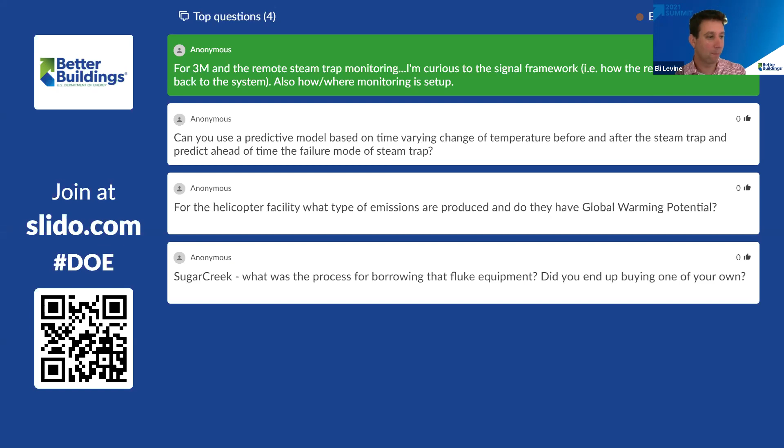So I guess for Owens Corning and Graham Packaging, you managed to produce such stellar videos that there were no questions for you. But any final reflections? I'll leave you guys the floor if there's anything you felt you wanted to add or extend your remarks from seeing yourselves give your presentation.

And if not, there's another question. For sure, yeah, thanks Eli. No, I didn't have anything else.

All right, well for SugarCreek, what was the process for borrowing that Fluke equipment? Did you end up buying one of your own?

We processed the request through the DOE, the standard paperwork - I was going to respond to that question, so they would have the email for it. Basically you put in the request, you get on the list. We are looking at purchasing 2 of the units for some of our needs, as we could use them a little more often, but getting the unit from DOE was painless. There's a waiting list because this is an in-demand unit, but it wasn't very difficult at all.